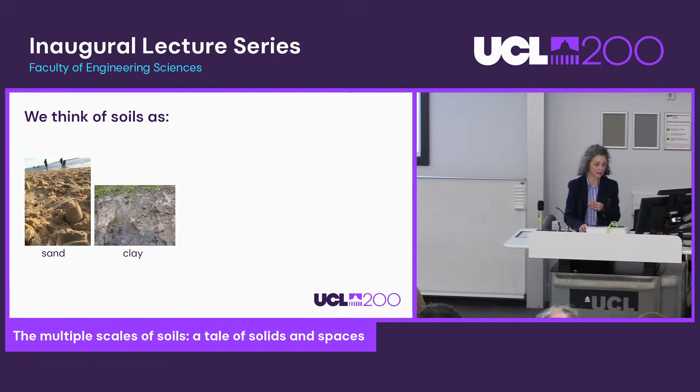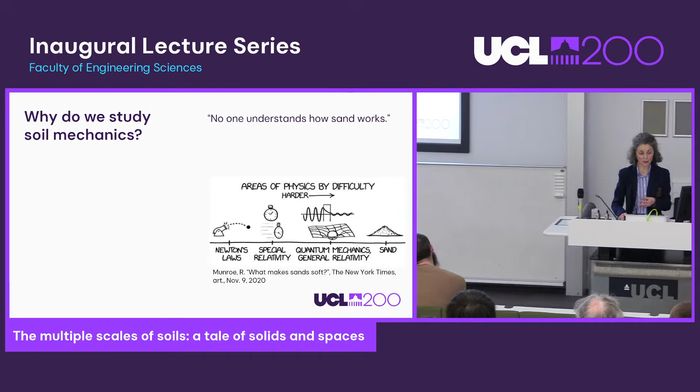So why do we study soil mechanics? Well, there is a practicality that we want to help with construction - basements, tunnels, foundations. But I think for us researchers in soil mechanics, we were very comforted by an article published in 2020 in the New York Times by a journalist called Munroe, who said no one understands how sand works. So we thought, okay, other people think it is difficult too. He made a diagram showing areas of physics by difficulty, and the hardest was sand behavior. So we feel somebody understands what we're facing every day trying to understand sands and clays. What I try to show today is how we can approach sands and clays in similar but also different manners to make more sense of how they behave.

He wrote in his article that sand is challenging in part because the grains have so many different properties like size, shape, roughness, and more. Size, shape, and roughness are things I will explore in this lecture as well.

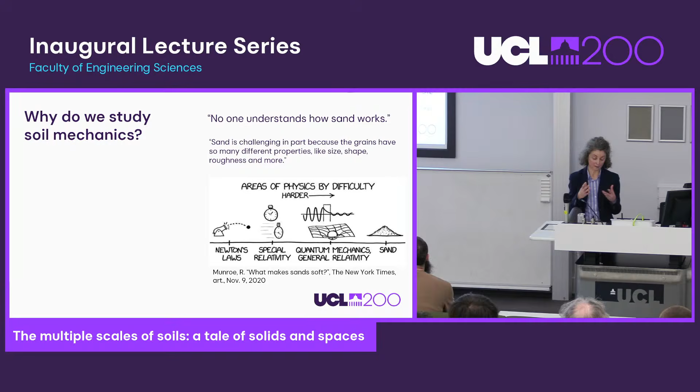Now, geotechnical structures are not always visible. If anything, they're only temporarily visible. When a basement is being made, you have a glimpse of the construction, but then it quickly disappears as the overground structure is built. And maybe that's why the geotechnical engineer is often the unsung hero of construction, I think.

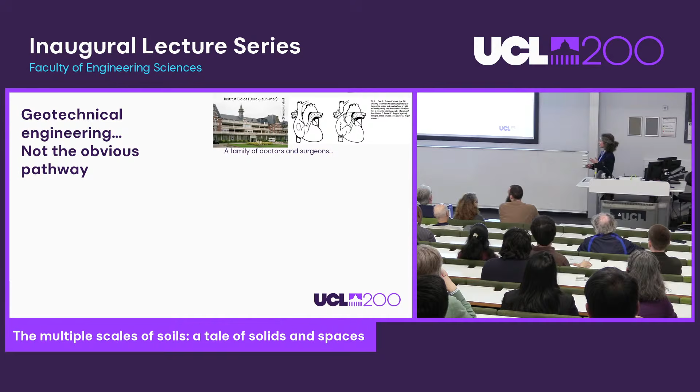It's called the Institut Calot. In fact, if you Google my name, you're more likely to find an article by my father, who with Fontan, his colleague and mentor, pioneered a heart surgery procedure I can't pronounce, or his brother, who was a reconstructive surgeon. Yes, a lot of people in my family are doctors or surgeons, but I had a grandfather who was a civil engineer.

He worked in Lebanon and in Morocco on the beautiful Bin El Ouidane Dam project, where he spent 10 years overseeing the construction. In fact, it was one of his colleagues, a geologist named Paul Lévesque, who donated a book to me, which helped me choose my career at a point where I was deciding between hydraulics and geotechnics.

So I went from Bordeaux to London via a civil engineering school in Paris, then an Erasmus opportunity to do a Master of Geotechnics at Glasgow University, with three wonderful months at La Sapienza in Rome, where the postdocs there have since become established professors and are friends now. Then I joined City University, a brilliant, vibrant group in geotechnics at the time, where I got the best possible training. Then UCL, with a small interlude in Hong Kong, as Jose said.

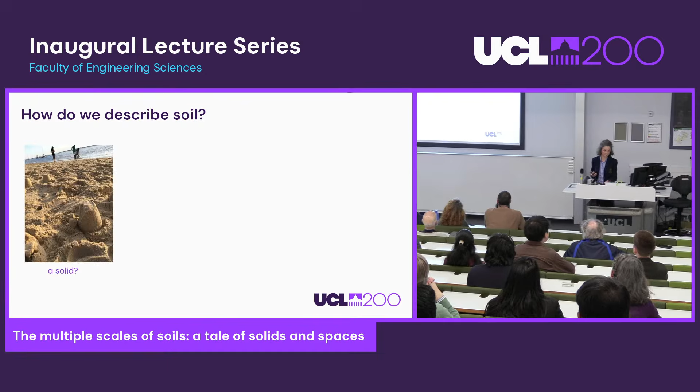But then I'm going to come back to the sand. So how do we describe soil? Could soil be described as a solid? I look at it, people are walking on the beach. Yes, I think it's pretty solid. So maybe it's just a solid.

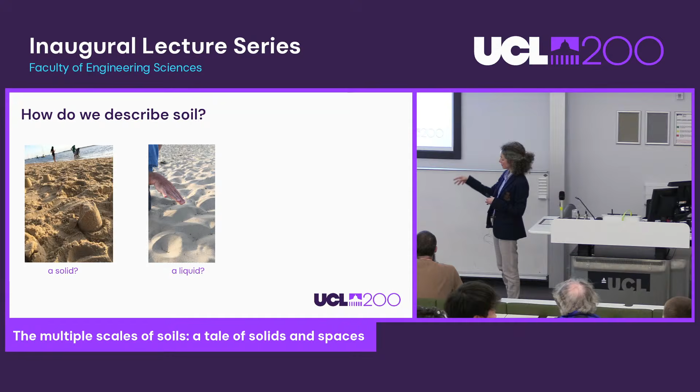But then I'm looking at this, and this is material - beautiful dry sand of Pilat. This is a beach where I've spent all my holidays with my family since I was born and before. The sand was flowing, and you could be excused for thinking that sand could be treated like a liquid. And then there is mud as well.

So where do soils come from? Well, at the origin of soils there was rock. Then rock, under climate effects like temperature and rain, fragmented into smaller and smaller bits of different sizes - gravels, sands, silts - and these were transported by ice, by rivers, by wind, and then deposited, depending on their size, in riverbeds or in shallow or deep seas. As the soil is deposited, it gets buried, and then it gets solidified, forming new rock. This is the rock cycle.

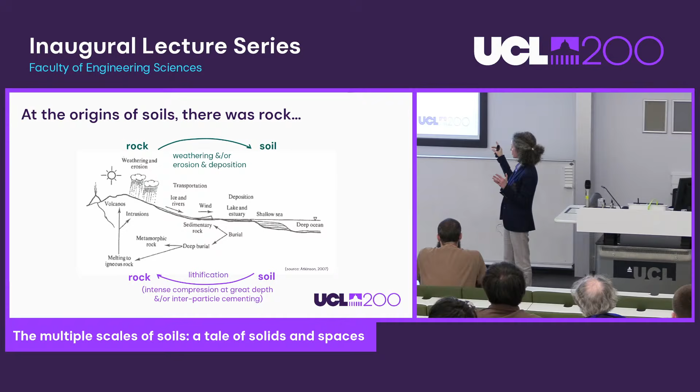Now, all this doesn't happen overnight. It takes tens of thousands of years, it takes millions of years. So this is a very long cycle.

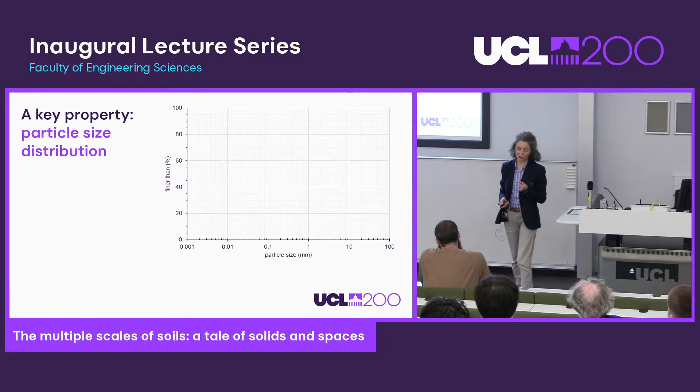A key property of soil, as we see, is that it gets deposited depending on how it's deposited and its size - this is the particle size distribution. So we typically look at what proportion of particles are of different sizes, and we plot it on a semi-log plot because the soil can span many different magnitudes of size. That helps us visualize its particle size. We have a strict classification of soils: gravel is larger than 2 millimeters, sand down to 63 microns, silts are in the middle, and clays are the very small particles, less than 2 microns.

Sand is not all the same. There are different sands with different sizes and mineralogy. Here's a typical quartzitic sand - I recognize the transparent quality of it, this is quartz. But what I can see is that if you thought sand was all little spheres of rock, that's not the case. They all have their own individuality and their own shape.

And then there is carbonate sand. It's made of calcium carbonate. It could be the detritus from marine animals, their vertebrae, but in this case this is just coral sand. So what we see is broken bits of coral, and therefore we have holes in the sand and very irregular shapes. We can imagine that the properties of these two different sands will be very different, and that this one may even be fragile.

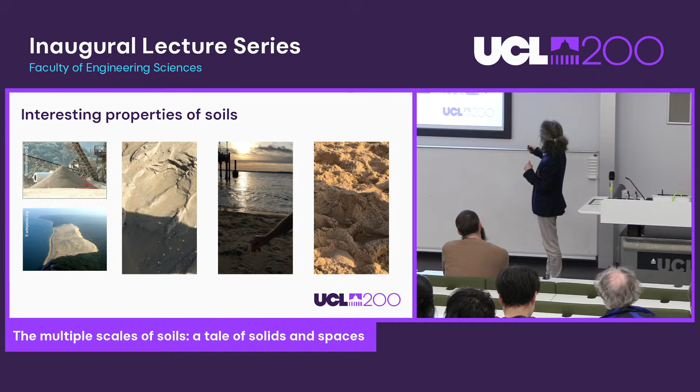And if you break a sandcastle, you will see that it is quite repeatable, that it will always form what we call a plane of failure, or a shear plane. And we can even try to predict what this shear plane could be with some simple analysis.

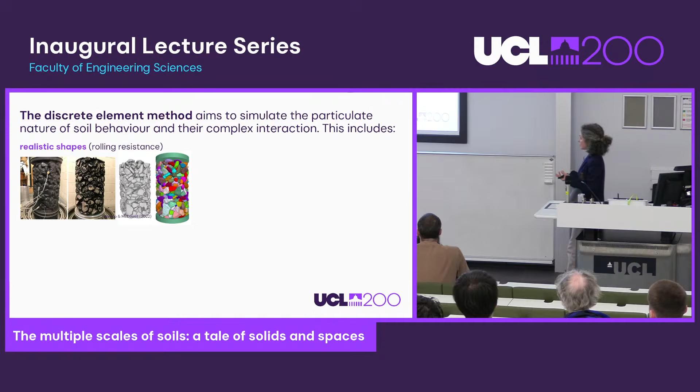And this interaction includes, well, it depends very much on the shapes. So colleagues at Nottingham University, Glenn McDowell and Matteo, a postdoc, have simulated ballast again. Why do they simulate ballast? We see some pretty realistic shapes that are mimicked on some models based on samples that they have impregnated with resin and scanned.

The reason is that it's quite difficult to have millions and millions of grains in your model. But also, if you look at it, every grain is a clump of very small spheres to simulate the shape. So if you imagine doing it at a very fine scale, how much computer power do you need to do that? It's not systematically done. In fact, in a lot of DEM models, discrete element methods, people still use spheres, and they add what you call rolling resistance to mimic the shape.

For modeling soil at the grain scale, we however need to know the mechanics at the contact, and that includes normal and tangential loading.

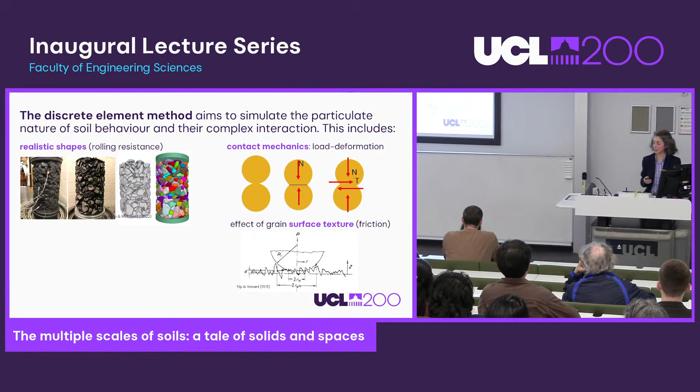And we feel that the texture is going to affect this behavior, so we want to know what are the effects of the grain surface texture. That's going to affect the friction between the particles. And then for some particles, maybe the carbonate sand, there may be breakage, and we want to know how it's going to break and by how much.

So if we wanted to create an avatar, a fake sort of sand, gravel, or ballast, what would we need? The shape, the roughness, the contact mechanics, and the particle breakage.

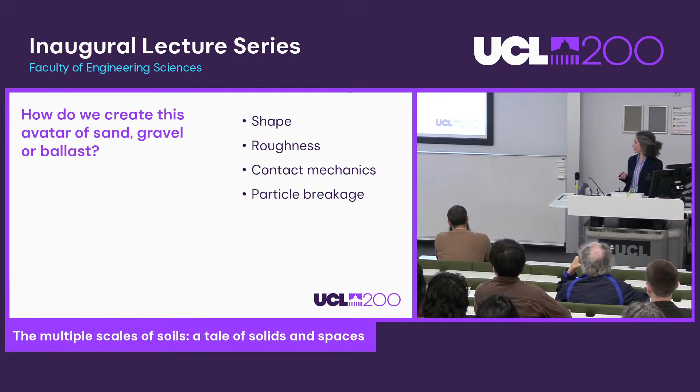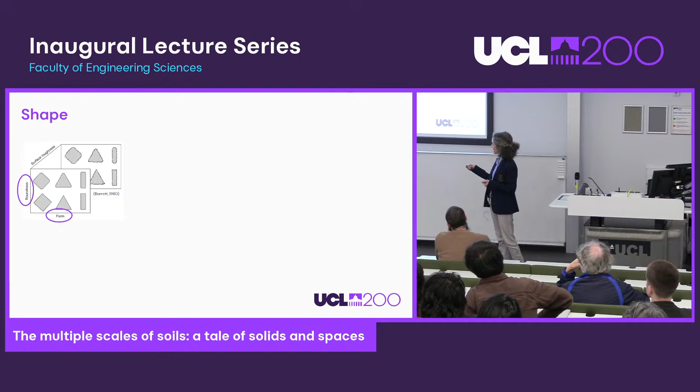Shape. Well, what do I mean by shape? Shape has, for us, 3 different scales. There's the scale of the form, which is very much the scale of the size of the particle. Here I have 3 rough forms: a square, a triangle, a rectangle. Then I have roundness, and roundness tells me about the corner or the angularity.

And if I move to this much smaller scale, I have the texture on the surface of my particle, and that's what we call the roughness.

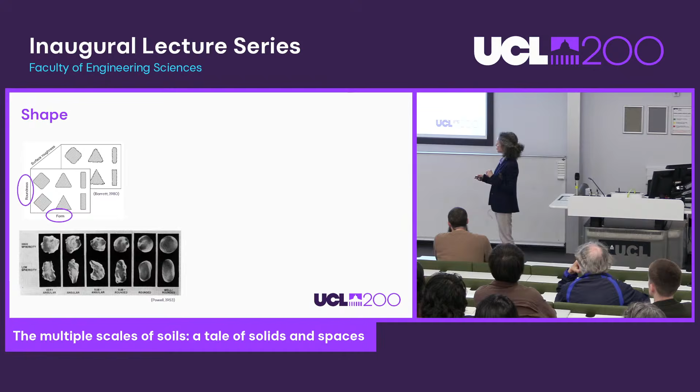In the old days, people would take their sand and try to compare it to this chart by Powers, and they would try to pitch where is the sphericity, how close to a perfect sphere the particle is, and how angular or rounded it is. So in the top row, I have all the spherical particles, but if I go from right to left, I have some corners developing, and here my grain is very angular even though it has a high sphericity, while here it's very rounded with a very low sphericity.

Now, as technology has moved on, we do much better. In our lab downstairs, we have an apparatus, an optical microscope, where we can scan every particle and get a profile. So for thousands of particles at a time, we get a projection of every particle and obtain a statistical analysis of the shapes and the size of the particle.

Of course, this is in 2D, so it's got some restriction. We can move to 3D. This was work by a postdoc of mine, Hongwei Wang, in Hong Kong, where he performed 3D laser scanning on crushed granite. And you can fit also some sphericity and angularity parameters to your particles.

Or you could just use X-ray CT, but at the microscale, so we call it micro CT. Here you have work by Newcastle colleagues. And the conundrum is how closely to the real shape can you go if you have to simulate every single shape of every particle in your sample. So you can think about the computer power you will need for that.

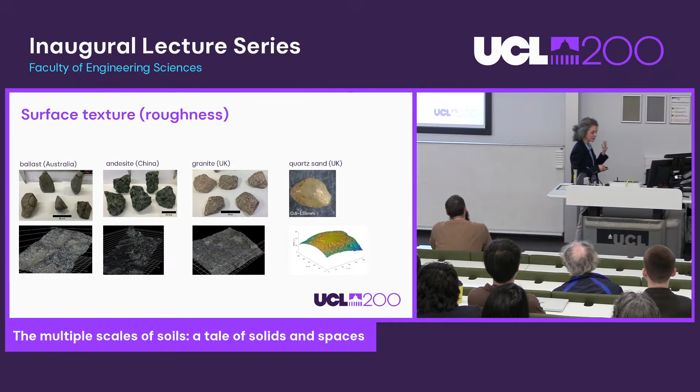Measurement is nice, but if you don't analyze it, it's a bit pointless. So I'm going to think more about this surface texture. And first thing I think is, what is this texture? It reflects how the surface is produced.

A simple example is a steel surface, which was produced by cutting. In this surface, I have a regular waviness. But if I zoom in, I would see a lot more irregularities. I would talk about long wavelengths for the waviness and short wavelengths for the irregular features. The waviness is my local shape, and the short wavelengths are my roughness, and both of them form my surface texture.

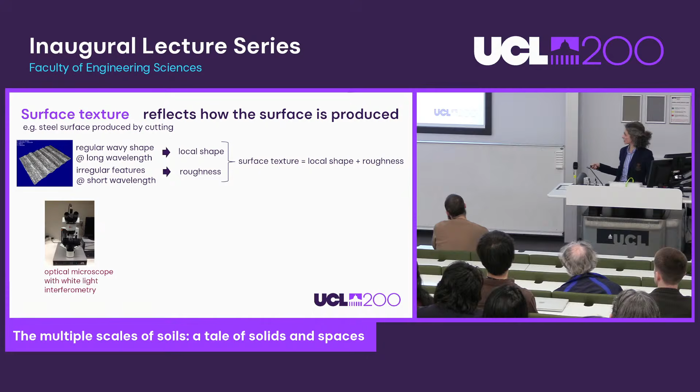For a grain of sand, I can use a different technique, which is white light interferometry. This is an interferometer that we had in Hong Kong, and I can determine or measure the surface of this LBS sand - it's actually coming from the north of London, Leighton Buzzard. It's a quartzitic sand.

So I can have the whole surface, but if I want the proper roughness and a measurement that doesn't depend on the shape of the particle, I will try to separate the long and the short wavelengths, the shape from the roughness. Even though it's attractive and usually there's software embedded with the analysis of your surface, it's scale dependent, and since it usually uses polynomials, you may not find something that's perfect for your particle. I should also say that sands have these particularities that their reflectivity is quite low, and they are very irregular, so it's quite difficult to do those measurements.

How could you quantify the roughness, therefore? Well, once you've taken that shape out, you're going to end up with a mean line and a lot of wiggling around it. You can take a root mean square average, and that's what we call SQ, which is one measure of roughness commonly used in sands. In sands, typically SQ is a few hundred nanometers. In ballast, it may be tens of microns.

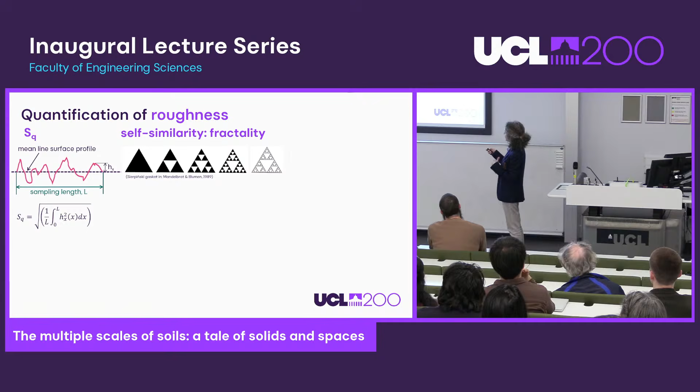Geologists have told us for some time that if geological surfaces have been created by random processes, it's very likely that they're going to be self-similar, which means that if I zoom in and zoom in and zoom in, I'm going to find similar patterns of the surface. This is a little schematic diagram showing this, what we call fractality as a property.

So if you have, say, a triangle and you divide the triangle into equal triangles and you continue down and down, you end up with a fractal design. We think that the surfaces are going to be the same.

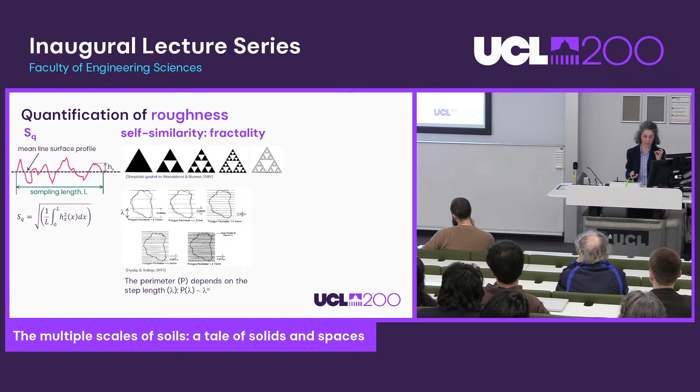Somebody who tested it was Vallejo in the 90s, and he took one of those 2D projections you can get from a soil, and measured the perimeter of the particle by taking different lengths of step. The smaller the steps, the more steps you need, and there is a power law relationship between the step length and the perimeter, and that defines fractality, this power law.

In terms of roughness, we can link the wave vector, the wavelength of the roughness, with its intensity, which we call the power spectral density. We found a linear relationship if everything's plotted in a double log plot, and this linearity tells us that our roughness is fractal. So we can determine some parameters to predict the roughness, to simulate it, including what we call the fractal dimension.

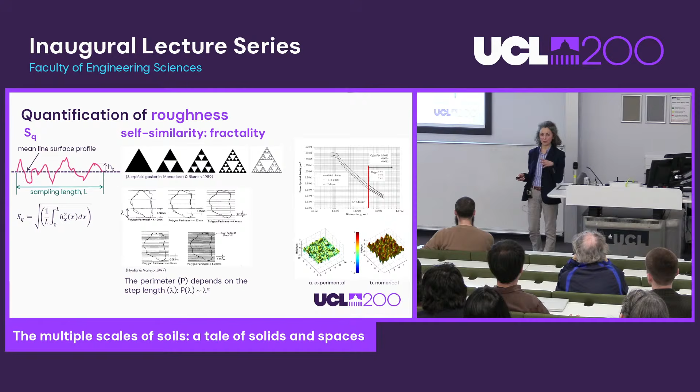How do we use it? We can use it to reproduce numerically the surfaces we measure. So if this is the surface that we measured experimentally, and we got some parameters, the D and the intensity, we can recreate, not exactly the same, but a statistically similar surface for our analysis.

Roughness will affect friction. I'll come back to friction later, but just as a reminder, we haven't invented friction, it's well before us. Coulomb in the 1700s was looking at friction, and he had a very simple way of doing it. He had this tray, and he was loading the tray and measuring how much force he needed to pull the tray. Okay, so this is friction.

And that's going to depend very much on the interface between your tray and what's underneath. If you do that, you find a direct proportionality between your value of T and your value of N. Interestingly, our soil developed the same sort of relationship, so we usually describe our soils as being frictional.

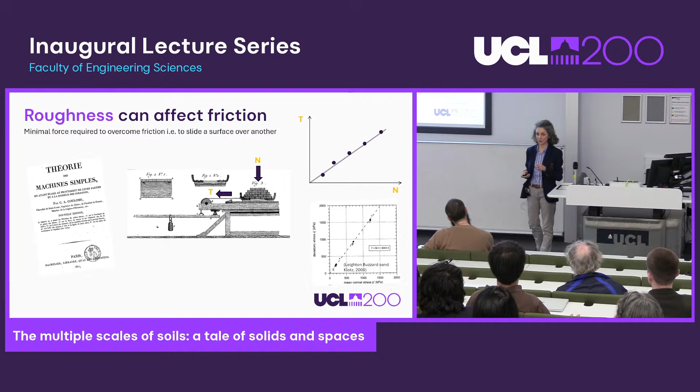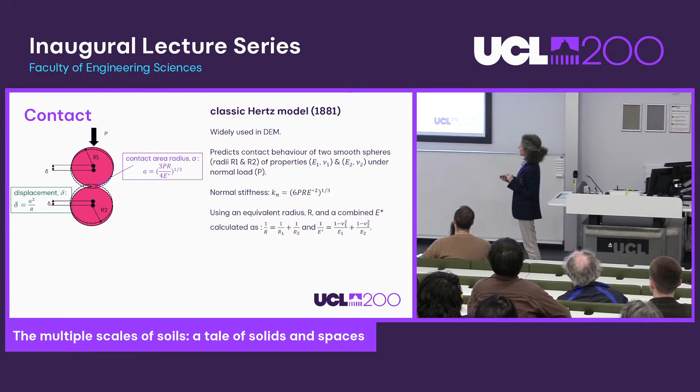For contact, the discrete element methods that we use in soils are still very much based in what was developed for engineered surfaces, nothing to do with geological material. A very common model is the one developed by Hertz for steel, and this is a model developed for spheres in contact, spheres that are smooth and elastic. As we've understood, this is not like soil.

Our soil grains are irregular, they're rough, they're not elastic. But how are we going to improve the models? We need experimental data.

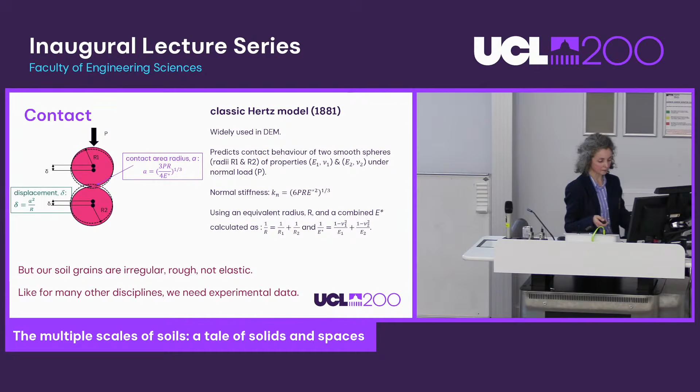We can obtain experimental data in our lab at UCL, as we have a bespoke apparatus to do exactly this, where we can do particle-to-particle tests. This is the apparatus. It was first developed at City University in Hong Kong by Matthew, and he reconstructed one here, improved it, and actually now we have two of those apparatus. We have 3 directions of loading, and we can measure displacements very accurately, so very small, and therefore we can test things from ballast, tens of millimeters, to sands of the millimeter size. If you haven't seen it, you should come to our lab in the basement.

Here we wanted to test the Hertz model, and this is work by Fatin Al-Tuhafi, who was working with us as a postdoc. We shaped a natural geomaterial, a granite, into spheres as much as possible, and we control the roughness of the surface as well by milling.

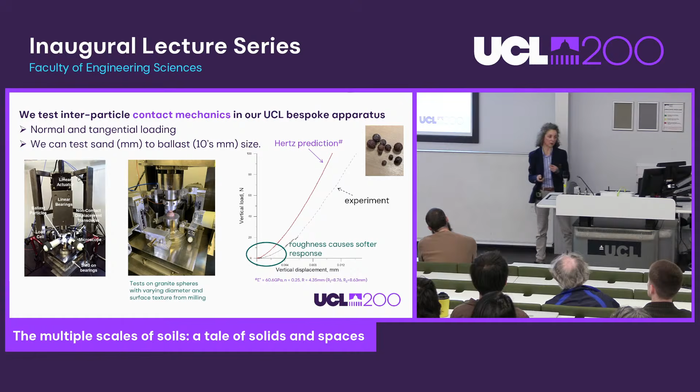And that's what we obtained. So if this is an expression of how the load developed with the displacement, and this is what Hertz would predict based on the characteristics of those granite balls, our experiment is still softer, and we think that's because of the roughness, and this is what many people think is the roughness.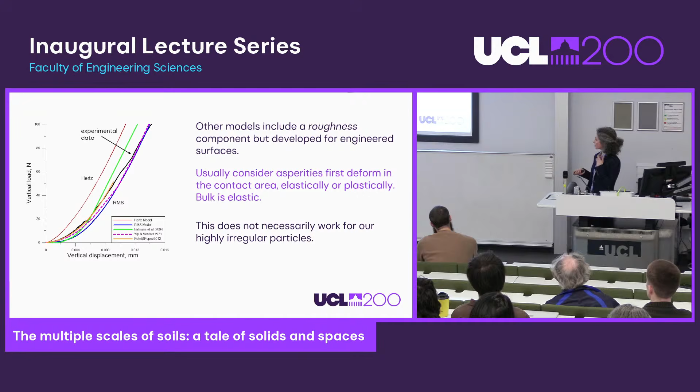It's not that roughness is not accounted for in models—there are plenty of models developed for rough surfaces. It's particularly problematic when looking at transmitted electricity contacts. Even though these models are developed for engineered surfaces, there's no consensus on whether the asperities forming the surface deform elastically or plastically, with the assumption being that the bulk of the particle surface is elastic. But that doesn't necessarily work for highly irregular particles.

So here's some tests we've done in Hong Kong. This was Yao Ting, one of my PhD students. She compressed one particle of sand, 1 millimeter across, against a hard platen, and at each load stage she used a white light interferometer to look at how the surface roughness was changing with the loading. Here's a very visual example.

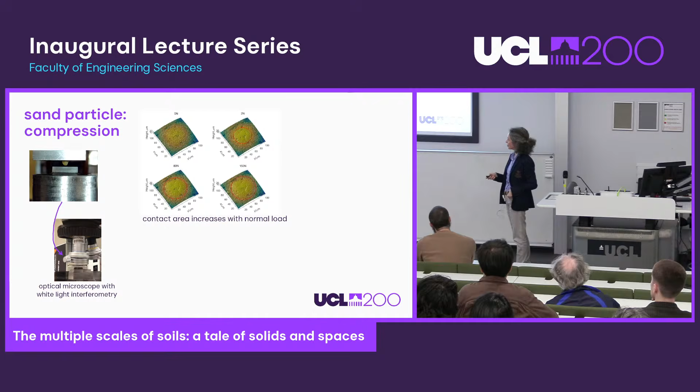These are height maps at 0 to 100 Newton load, and we see clearly how the irregularities are smoothened out, and the contact area develops and increases with the normal load. These measurements were on the surface of the particle, 100 by 100 microns, quite complicated to do, specifically trying to replace the particle exactly at the same place. Quite extraordinarily, she managed to map the different profiles, and we saw that the bulk of the particle is deforming plastically under load, not elastically like most models believe.

Further work was done by Saurabh Singh, our recent postdoc, who managed to put together images of how the sand deforms under load, under compression. That was beautiful.

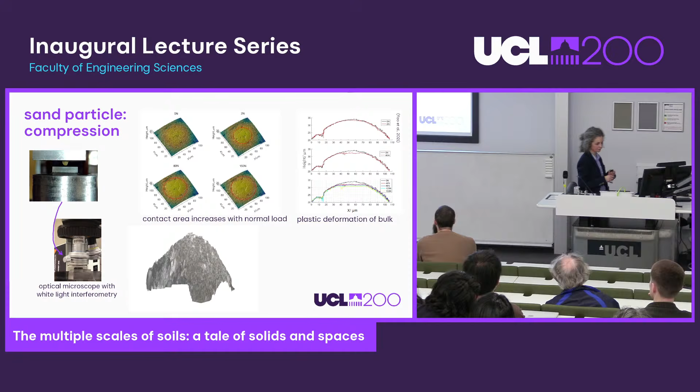We've done the same with ballast. You do a test where you load, unload, take your particle, and do the roughness measurement. He had some ability with computers, so he was able to look at how the shape of the ballast deforms, and we see how it deforms not just in the contact area, but further down in the bulk.

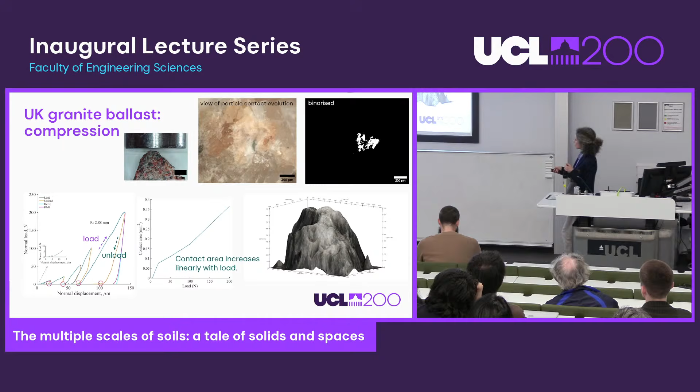What was more impressive is that we were able to map the particle contact area, which people usually cannot do, and by binarizing it we found a relationship between the contact area and the load—a linear increase. This is great for modeling. So we have plasticity here, and we can understand better how the geomaterials are behaving.

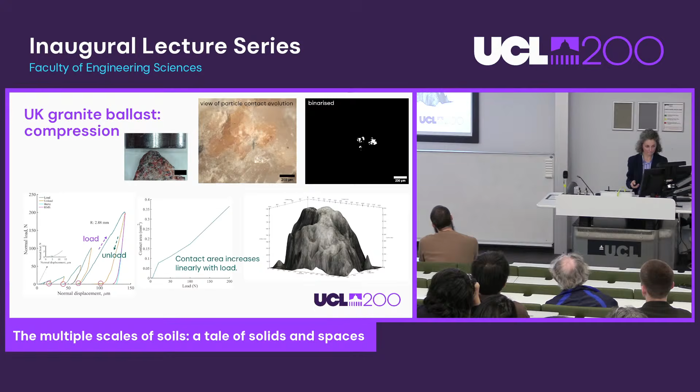What we see is that there is a stabilization—the soil has the same sort of sliding strength, which we call the coefficient of friction, a ratio between T and N, the shear force and the normal force.

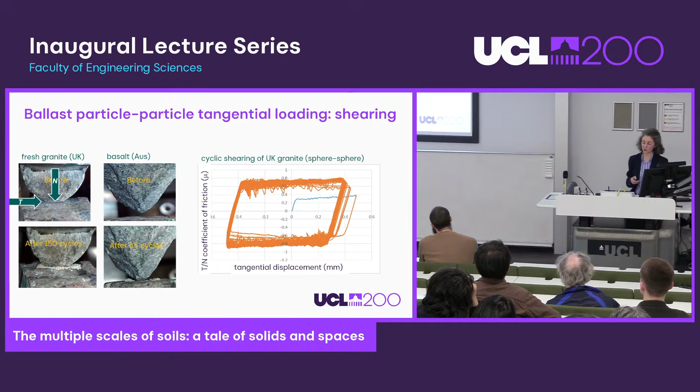What we found as well is that there is abrasion when you do that, but I won't talk about this. This interparticle friction varies with different sands—this is work that Vincenzo Nardelli was doing in Hong Kong. It's great to see how, from a ball bearing with very low friction (mu) and quite smooth, to our quartzitic sand, to the carbonate sand, how the friction evolves with the mineralogy and characteristics of the sand.

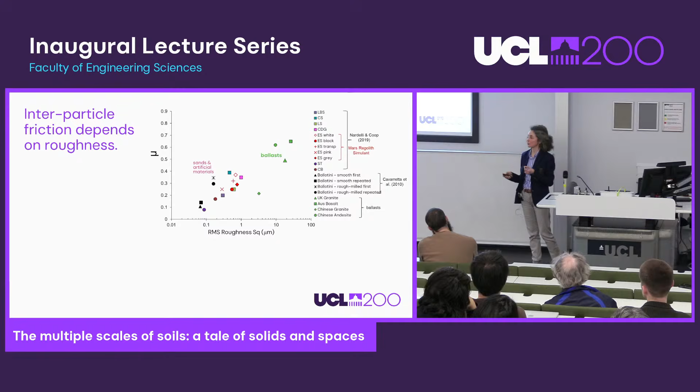What was even nicer is that we could relate this friction to the roughness, the Sq roughness of our particle, and we see how they all align to tell us that as the roughness increases, the friction increases. This also worked for ballast. I should point out that Vincenzo Nardelli also tested Mars regolith, a Mars soil simulant, which also aligned with everything.

Finally, particle breakage—yes, particles break, as you will see, they're not completely unbreakable. How do we map breakage? This is beautiful work by Chris in Hong Kong and Matthew, looking at what's happening to a soil when it breaks.

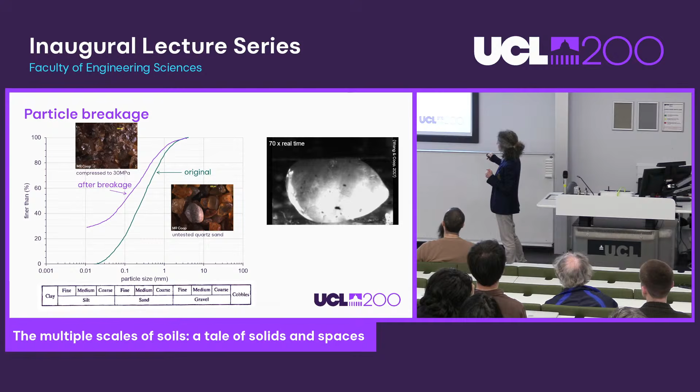We start from the particle size distribution introduced earlier, looking at the difference between before and after testing. You usually find that your particle size distribution rotates up as more small particles are created. But you also see that the larger particles are not broken because they're cushioned and protected by all the smaller particles.

We have tested, Fatin, again, when she was doing her PhD, has tested these glacial sediments from Langjökull, which we went to retrieve in Iceland. And we should mention that we crashed the Land Rover, the UCL Land Rover, when we did that, actually. But we did bring it back.

And whatever amount of compression and shearing she did, we found that there was no breakage. So there is no breakage because, similarly to what we were finding for roughness, fractality has something to say about it. So when the soil crushes in a self-similar manner, which means that if you have a cube and it crushes in similar size cubes, etc., you will end up with a whole particle size distribution. And when you finally reach this fractal grading, you will find that all the particles are protected by the other particles. But this doesn't work for all the soils, so there's always some oddities like gap-graded soils.

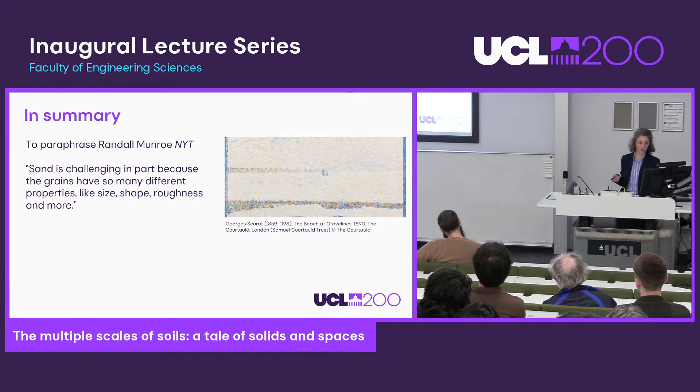So for sand, yes, sand is challenging because of the size, the shape, the roughness, and much more.

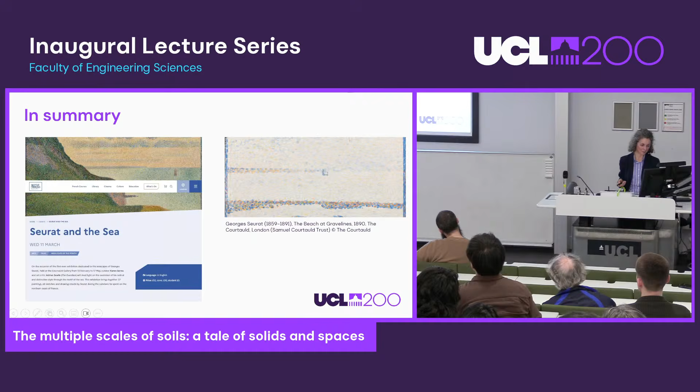Can we analyze them in the same way? Will they be easier to model? Well, they also have different mineralogy.

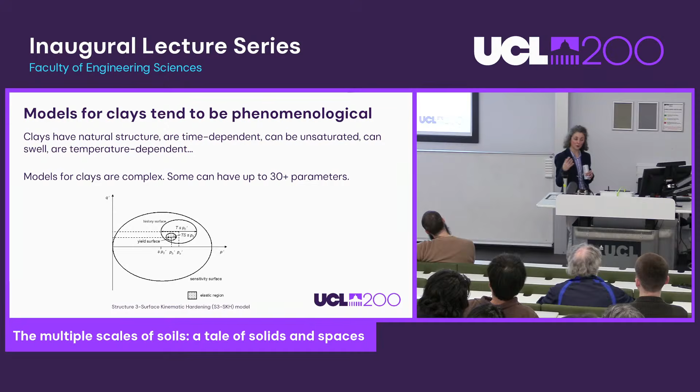The model for clays tend to be phenomenological because clays have got a lot of complexities, time dependency, and saturations. They can swell, they're temperature dependent. And as a result, the models are complex, and some have more than 30 parameters, which is definitely what you don't want for a model. And this is a first incarnation of me. This is my PhD work where I developed this 3 surface kinematic hardening model. And no, it did not have 30 parameters.

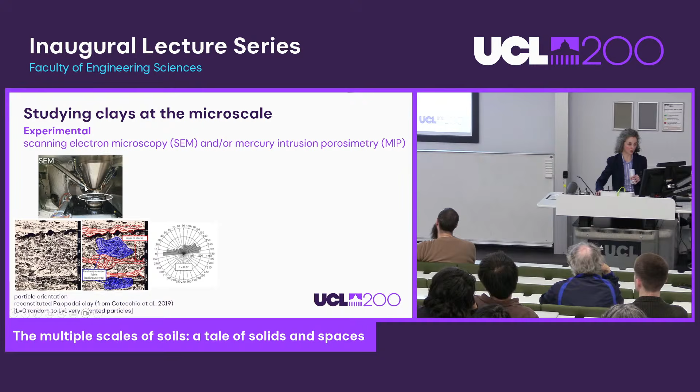So how can I study the clay at the microscale if I want to mimic what is so well developed for the sand? Well, I can do experimentally. I can use scanning electron microscopy or mercury intrusion porosimetry. So here, if this is the SEM, I have a tray with lots of small particles of clay, and I can look at them from the top and obtain something like this, so I can distinguish domain and think about orientation.

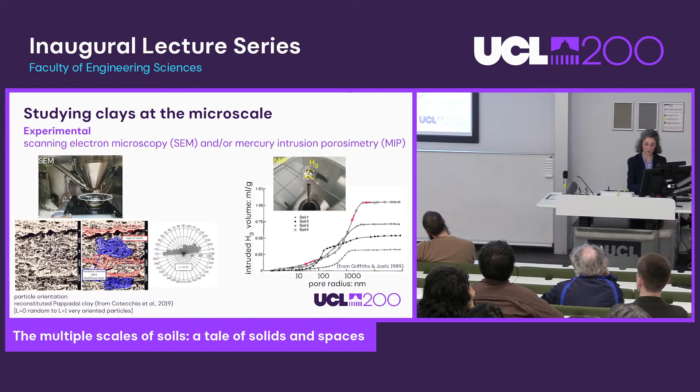With the MIP, I may have some very small samples of clay. I'll explain how you get them later. You fill the container with mercury and you put the mercury under pressure, and as you increase the pressure, you're going to intrude more pores in your clay. And you're going to have a bit of a symmetrical thing to the particle size distribution, what we call a pore size distribution. So here, if this is the intruded volume of mercury, we see here that there's not much intruded, and then suddenly a lot of mercury is going in for these pore sizes, and then it goes in a bit more slowly. And we have different curves for different soils.

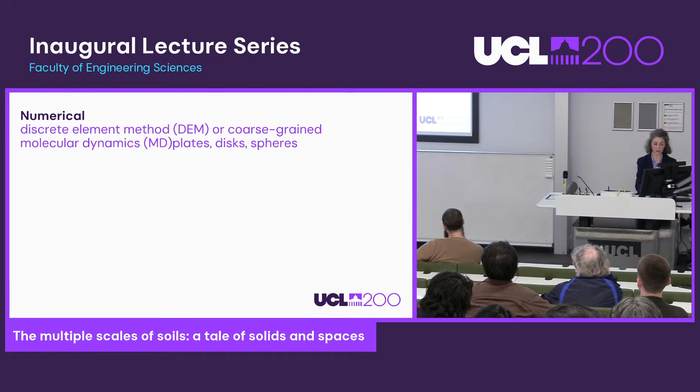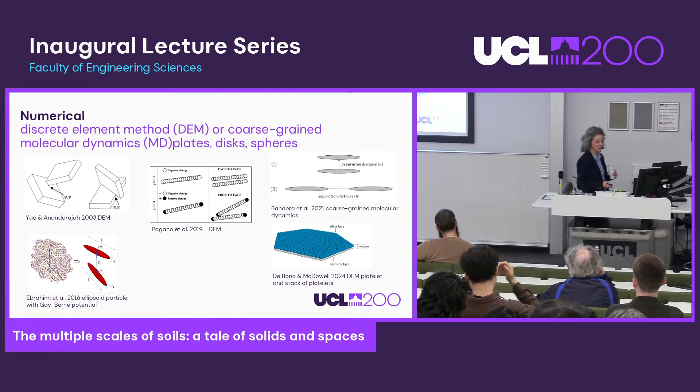Numerically, people have tried, so they're still trying to use a discrete element method, or molecular dynamic, as we say, and they're using plates, disks, and spheres. But the problem with clays, unlike sands, it's not the contact between particles which is important. It's because they're so small, it's the charges on the surface of the particle that are going to matter, electrostatic forces. And this is very difficult to model, as well as very small particles.

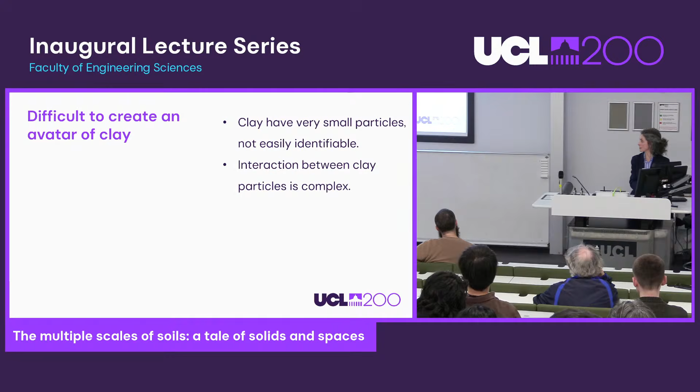And those particles are not easily identifiable. The interaction is complex. So for example, if I go back to this image, which was taken by transmitted electron microscopy, so here, this is a little bit of a clay. So what do I make of that?

The clay is typically an assembly of clay mineral layers, aluminium and silicon, with some interlayer pores. So we're talking angstroms, nanos, very small. One of these stacks forms a particle, and this is a particle I can see here, about 20 nanometers across.

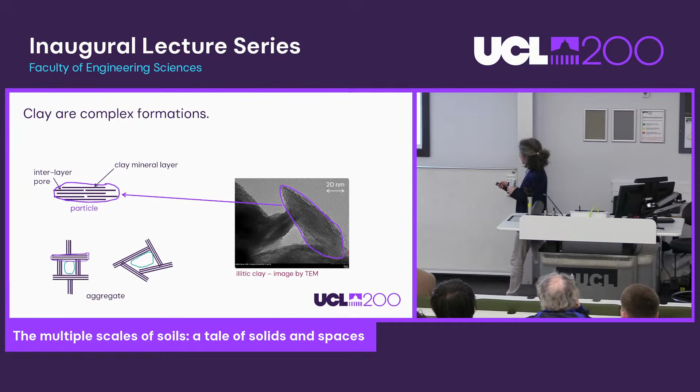And then those particles may form some aggregates. So this is my particle here. But I can distinctly see some pores here, and I can also see the pores here. So why not think about pores? Because the particles are so difficult to model and to identify.

If I want, these are just images. If I want to do some measurements, I have mercury intrusion porosimetry. And for the very small pores, I use gas adsorption, typically nitrogen, or some X-ray scattering.

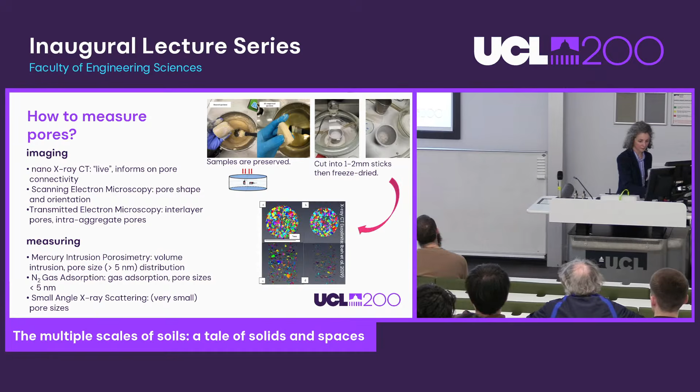In our lab, what we do, we test our soil. Maybe this is one of our soil samples. We preserve it in cling film and wax, and then cut it into very small sticks that we freeze dry. To freeze dry, you put it in liquid nitrogen at its freezing point under vacuum, and then you sublimate the ice. And then you do your test, whatever you want to do.

The pore size distribution - here a bit of technique. This mercury intrusion porosimetry, why does it work? It's because mercury has this non-wetting quality, which means that if I just put a drop, even if the material is porous, it's not going to wet the material. So I need to put some pressure on the mercury for it to intrude the pore. By using the Laplace-Young capillary law, I can link this pressure to the entry radius of the pore. So of course I have to assume what will be the shape of the pores, but that will work.

And depending on your pressure availability, you can intrude pores down to 5 nanometers. Now I should say that this porosimeter is not here - this is in Paris at the École Nationale des Ponts et Chaussées, where we have some very good collaborators who kindly let us use their facilities.

And this is a kind of intrusion-extrusion curve you get. Note that the extrusion is not like the intrusion because there will be some trapped mercury, and that's a defect of the method.

So an example of what we can measure: one-dimensional compression, and we typically plot the void ratio. That's just the ratio of voids in terms of volume to the ratio of solid. So if you put a sample of soil or clay here in a ring that cannot deform laterally, and you just load it vertically, its voids are going to decrease, and we usually plot it against the stress.

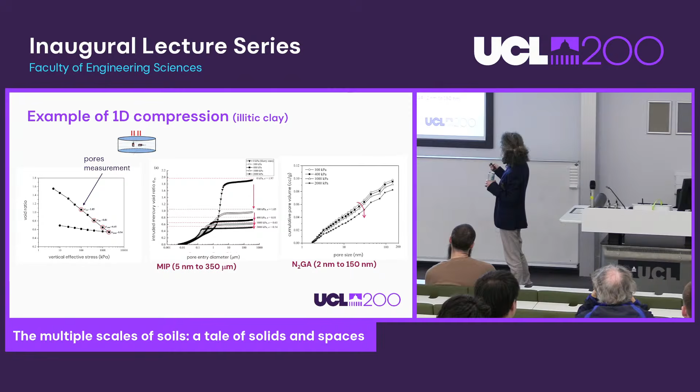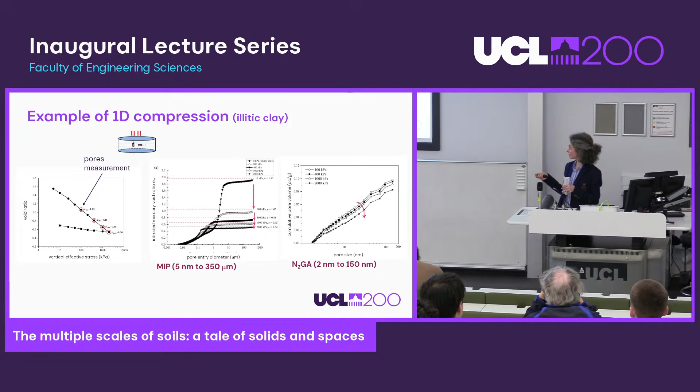Now, while most people thought in the past that the very small pores that I was looking at inside the aggregate do not deform during this sort of loading, actually, when we did some gas adsorption tests, we found that the very small pores also deform. And that has inspired us to think differently about the model, which I will show briefly later.

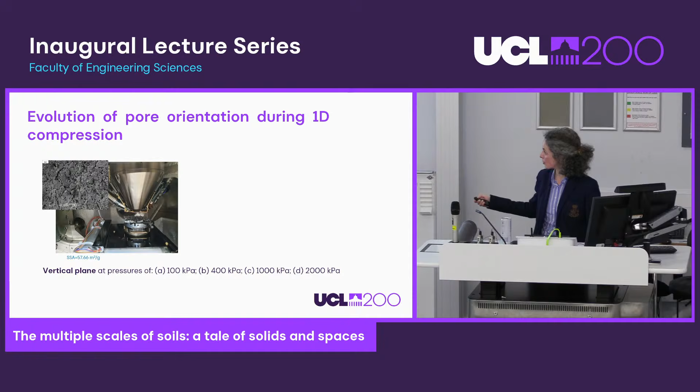We can also look at the orientation during 1D compression. So this is our SEM samples, and we're looking on the vertical plane. I was testing that way, I'm looking here. And so I have, for each stress level, a picture of the soil.

I sort of delineate the pores, and then I fit them with ellipses, best I can do, and I can get some shape, but also some orientation of the pores. Note that in what follows, I'm going to use the loading direction as the horizontal direction. So at 100 kilopascals, at lower stress, everything's the same - the pores are randomly oriented. But as the stress or the load increases, we see a definite direction forming in the pores.

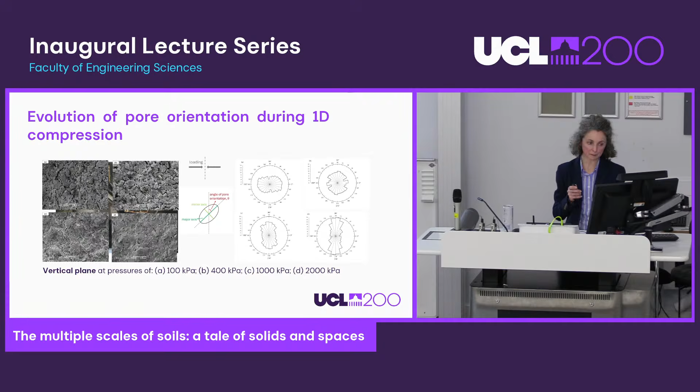What's exciting for us in research is that this was sort of expected, but in soil mechanics, a lot of our theory is semi-empirical. You test and observe, and luckily everything becomes sort of linear on a semi-log scale, or it's fractal. But here we wanted to test the phenomena that form our theory. So I'll give two examples that are a bit beyond, and the first one is going to talk about failure.

What you find is that if you do a bit like a sandcastle, you restrain your soil and apply an axial load, your soil will fail. At this failure point, the stress on the soil remains constant and the volume is constant. You can do this at many different stress levels, and you get what you call the critical state line, which is like a failure line—a location of the failure points of the soil.

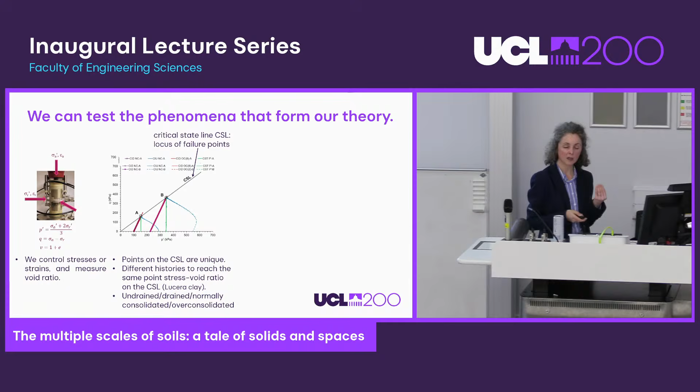These points are unique in our theory, but that doesn't mean they have the same pore size distribution. This was work by Yan Hao during his PhD here at UCL, and any point reached by four different stress paths takes over a year, because each test takes several months, and then he has to take them, degas them, and take them to Paris. Remarkably, all these different tests, made on different samples and following different histories, had matching pore size distribution.

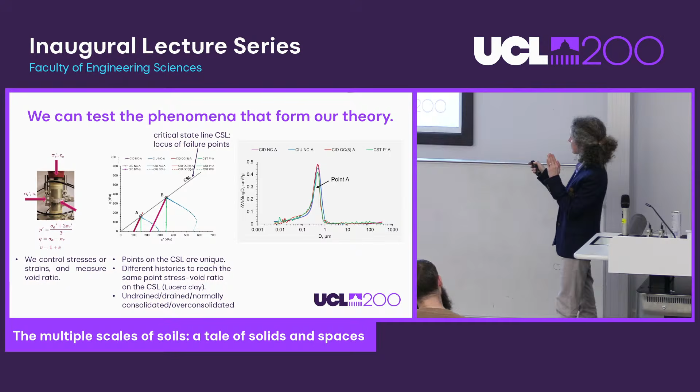Here the pore size distribution is plotted a little differently, showing the dominant pore size. I can see I have a dominant pore size, and it's the same whatever the stress path I've used—here I've used four at this A point. For satisfaction of mind, we did the same for B, and remarkably we again find that the pore size distributions coincide whatever the stress path used to reach that failure point.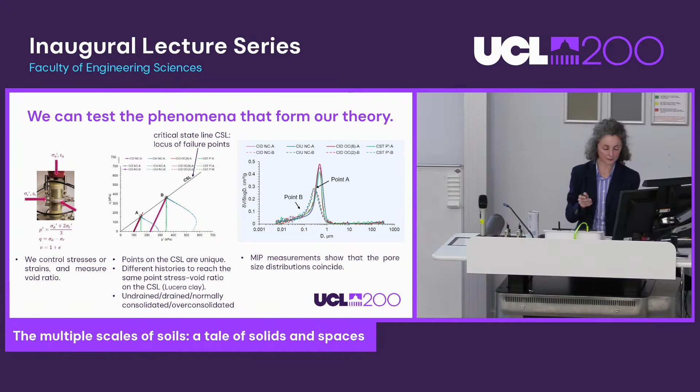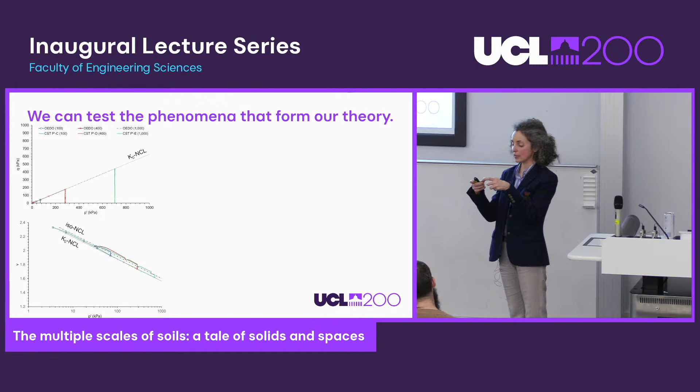We were not going to stop there, so we also tested what happens during one-dimensional compression, when the soil is not allowed to deform radially but the load on it is vertical. This gives us what we call the normal compression line, similar to what a soil experiences when it's being deposited—the vertical load increases and the horizontal stress increases in proportion.

You can reach it by enclosing your soil in a ring and increasing the load, or if we use one of our triaxial apparatus, we could do an isotropic compression followed by a pure deviatoric shearing. So we have two paths to reach points C, D, and E, and here we look at how the void ratio is changing during this test.

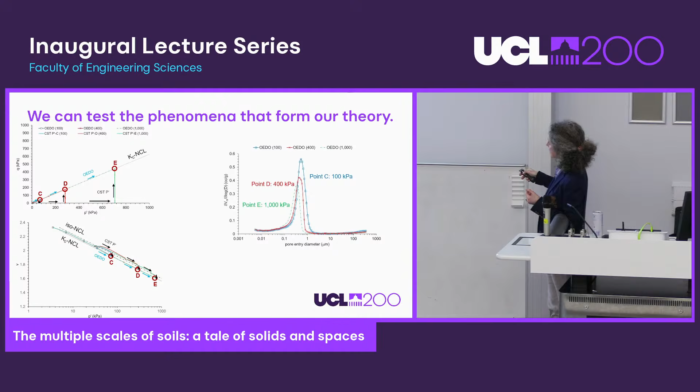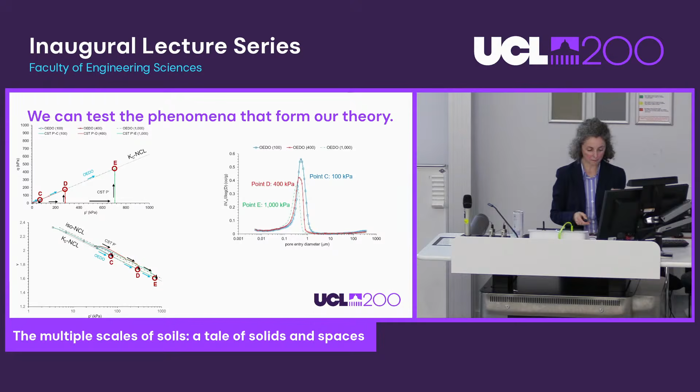Along the path with the oedometer test, similar to the 1D compression shown before, we have C, D, E. The total intruded volume decreases, and there's a bit of a shift in the main pore size. But what's remarkable is that, taking totally different samples with different stress paths to reach the same point on our normal compression line, we found coinciding pore size distributions.

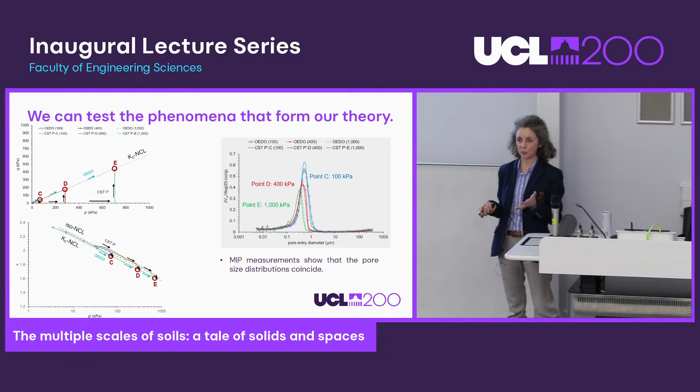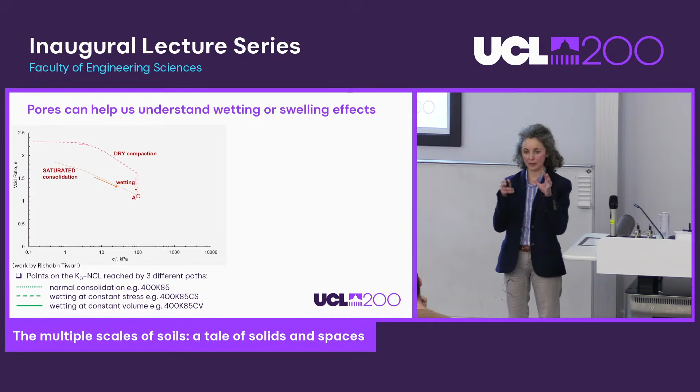That still gets us thinking, and we're trying to figure out how we can improve the models with what we found—it's still quite recent. This work is being continued by Rishabh, a current PhD student who's just submitting now. Here we're testing wetting, because wetting is very important when you're thinking of clay—engineered clay barriers for landfills, and also as a buffer for nuclear waste geological disposal.

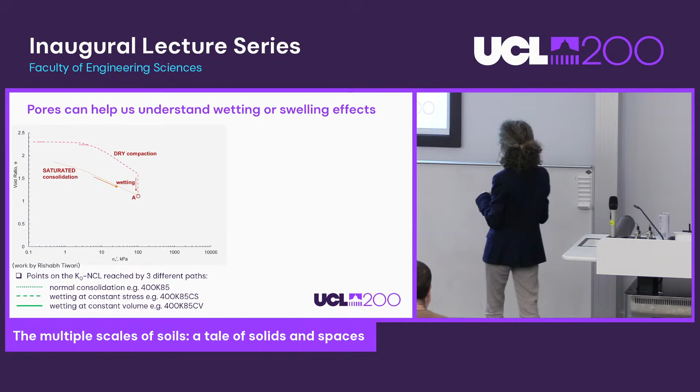So here we tested a clay, I think kaolinite. This is a normal one-dimensional compression. He also took the clay completely dry as a powder, compacted it, and wetted it until it reached, under a controlled stress, the same point A. So it's always the same trick - we're trying to reach the same point.

What you can also do is compact it dry and wet it at a controlled volume. The story is the same - we found three coinciding pore size distributions. You have to try it again and again, and for three different points we found the same. That was beautiful to see.

This sort of buffer that people look at for burying canisters full of nuclear waste - we also want to know how the clay may swell. So we looked at the length of swelling of the clay and how it changes the pores. The longer the path of swelling, you have a change in the pore size distribution, but more remarkably, Rishabh also did X-ray scattering tests and found changes in the very small pores, in terms of angstroms or nanometers.

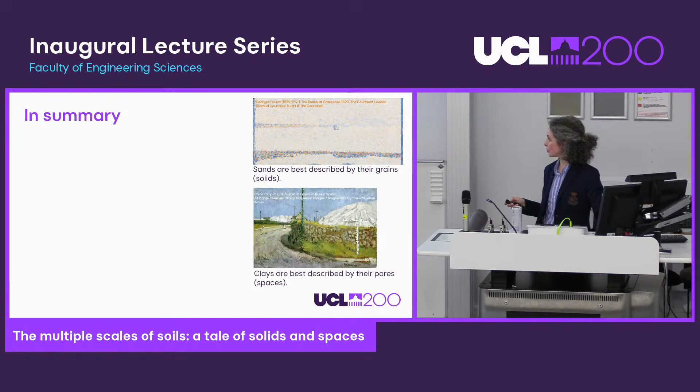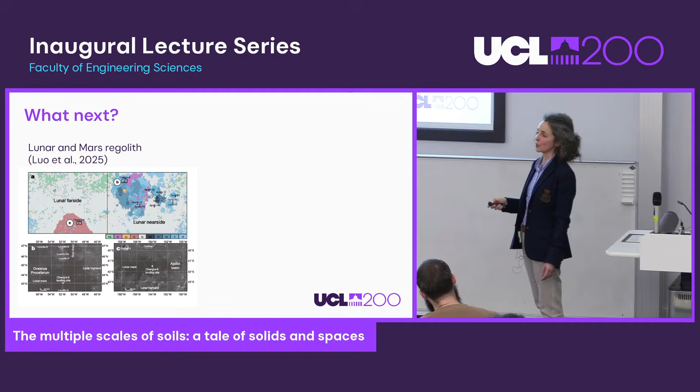So sands, I think, are best described by grains, and clays are best described by pores. So what next? We have colleagues at Tsinghua who are lucky to have been given a few grams, very few, of lunar soil from the near side and far side. With these few grains, what do they do? They look at particle breakage - mind you, they were only allowed to break one grain because they have so few. They also look at particle shape, because they want to create an avatar, since nobody can test the actual lunar soil - you couldn't fill one of our triaxial experiments with it. So you need an avatar.

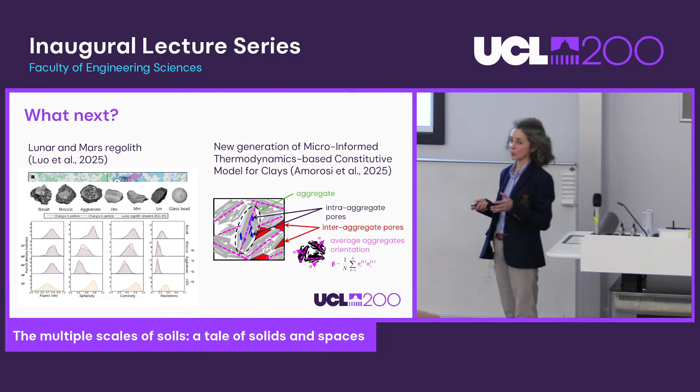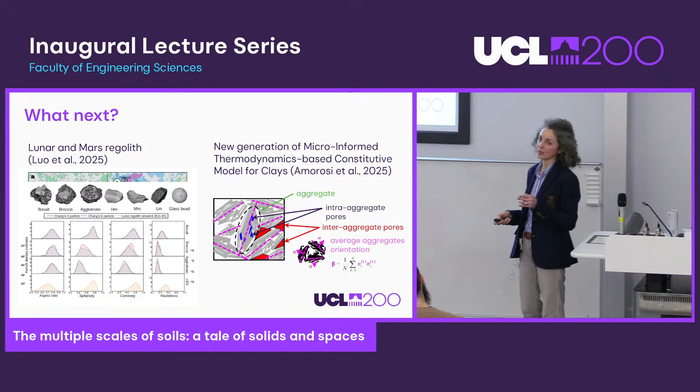And what about the clay? Well, Angelo Amorosi, currently at La Sapienza, a good friend now, has been really inspired by our work. He's developing - this is very hot off the press - a new generation of micro-informed, thermodynamics-based constitutive model for clays, where we have our little aggregates, intra-aggregate pores, and between the aggregates, the orientation of the aggregates.